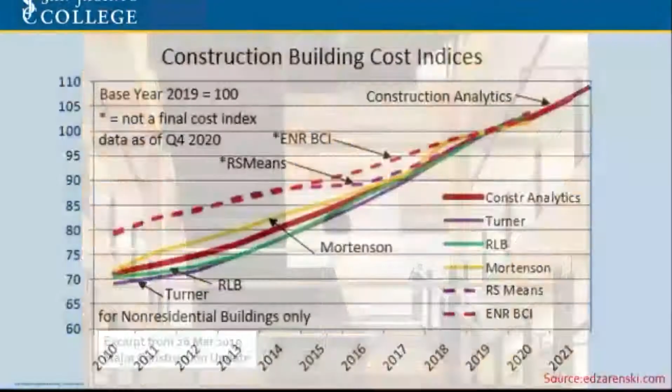Our 2015 capital improvement program was planned in 2014 with an 18% cost escalation provision, which took care of us into 2018, but it was already 2019. We had already realized a 22% cost escalation, perhaps more if you considered the double whammy of Hurricane Harvey and the state's early adoption of the IECC 2015.

Because of phasing concerns, it looked like the best we were going to be able to do was to complete our proposed classroom building in 2021, by which time the forecast was that we should expect a total of 32% cost escalation off our original bond. That, of course, meant either that we might go drastically over budget, which is not an option, or that the signature general education building in our portfolio would need to be scaled back to the point where it's a disappointment to some of our stakeholders.

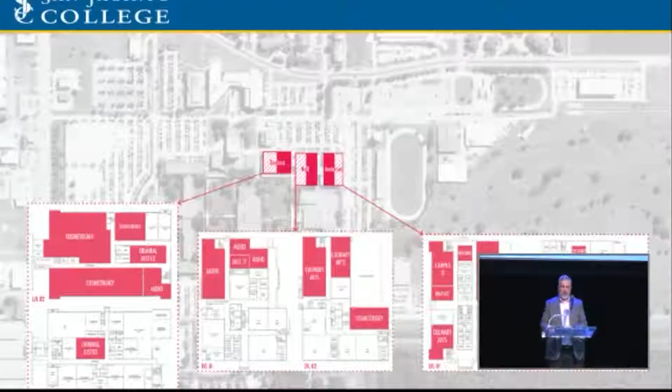Unfortunately, we were unable to accelerate the classroom building by more than a year because of all the interconnections imposed by its master plan site. The new building could not be built until the predecessor buildings were razed, but that could not happen until all the programs that they housed had new homes.

Renovation of the adjacent Davison building couldn't begin until the process technology programs moved into the new LyondellBasell Center in the summer of 2019.

Relocation of the drafting program had to wait on completion of the South Campus Engineering and Technology Building in the fall of 2019. Culinary and cosmetology programs had to wait on completion of the North Campus Culinary and Cosmetology Building in the spring of 2020.

A home had to be found for our fire protection program, which ultimately happened in the summer of 2020.

And finally, the campus IT function, along with the criminal justice and audio engineering programs, couldn't be moved until the Davison building completion, which was anticipated in the summer of 2020. Only at that time could demolition of the predecessor buildings begin, which meant that our best case for construction is the window that we actually hit.

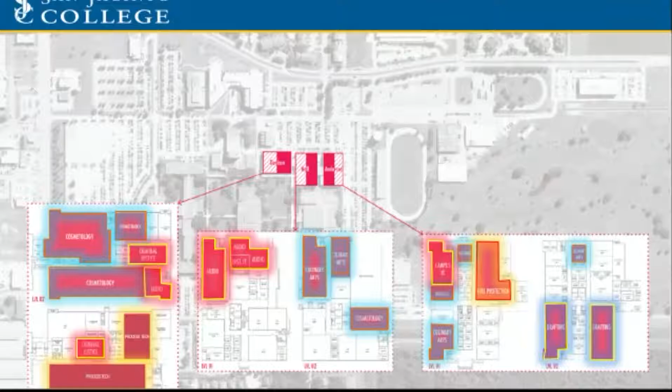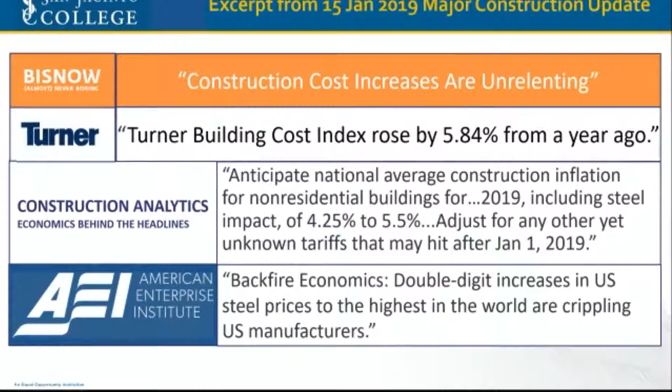So for that reason, we began to look at some alternate construction methods, such as this composite concrete and timber project at the University of Arkansas, as a possibility for delivering the central campus classroom building. In addition, we mined all of the capital improvement program projects that had obtained cost certainty for savings, so that we could bring forward recommendations to our board.

As we went through 2019, it seemed clear that steel prices were likely to continue trending up, although with significant volatility due to tariffs, but that the cost of lumber was likely to remain stable, if not trend downward. These curves are not relative to each other, but relative to their own market pricing as a percentage of their historical commodity price. And neither one of them anticipated the impact of COVID.

So most of the people in the room at this point know that commercial construction stopped, which lowered the price of steel because nobody was taking it. And everybody that got stuck at home, couldn't go into the office, started replacing fences and remodeling their houses, and the price of lumber tripled. Fortunately for our project, we ordered our timber before those impacts took place.

By May of 2019, program leadership and the team at Kirksey had devoted a significant amount of effort into evaluating mass timber as a sustainable and economically conservative approach to a new classroom building. We came to the conclusion that within the size range we were looking at, mass timber, composite steel, and cast-in-place concrete were all cost competitive.

Mass timber had the advantage over composite steel in that it was likely on a declining price curve without tariff volatilities. In terms of sustainability, mass timber outperforms concrete or steel by several orders of magnitude in carbon sequestration.

With great trepidation, I asked the chancellor and the board if they would be willing for the college to explore the mass timber option with our authority having jurisdiction, the city of Pasadena. Because we had done our homework, we were able to answer the two obvious questions: how would it fare in a flood, and how would it fare in a fire? Surprisingly well, and better than you might expect, or better than we have now.

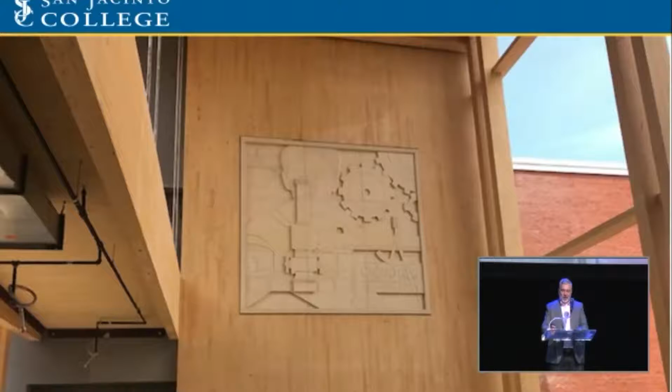These included salvaging this bas-relief sculpture from the facade of the old Anderson building to become a focal point of the new lobby, and salvaging nearly all of the marble cladding that was used on the exterior of the predecessor buildings to be reused at key places inside the new structure.

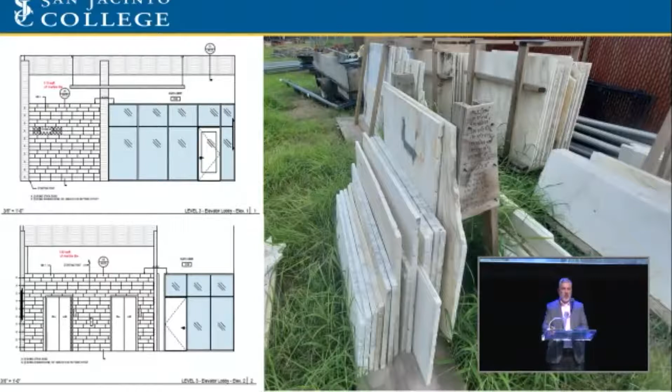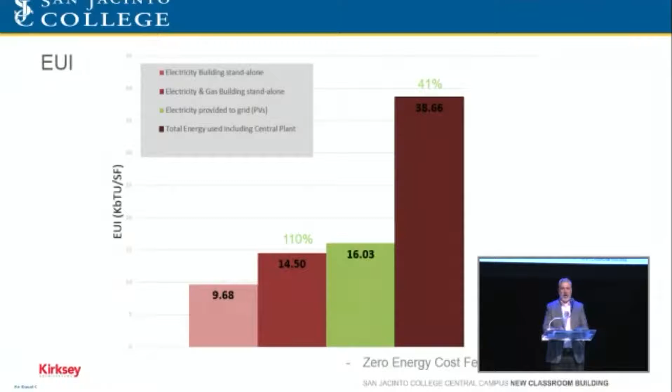The reason for the disconnect there is we're also served by a campus energy plant that we get our chilled water and hot water from. Depending on your assumption set, there was an argument to be made that those solar panels nearly save enough to allow the building to operate at net zero energy cost, which is why this graph was prepared. But we decided to let history validate that possibility rather than claim it up front.

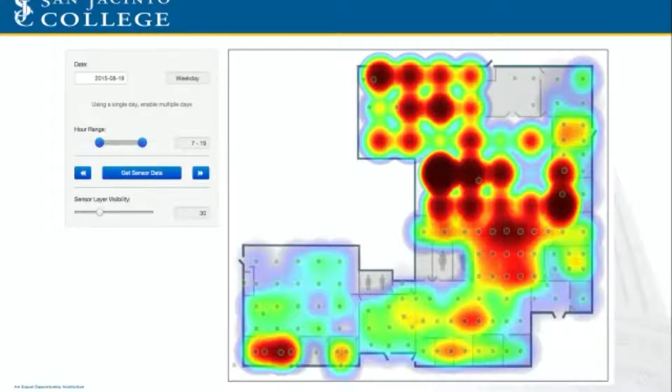We also incorporated smart sensor technology into the building, which will not only control lighting systems, but will learn how people use the building, tell us where people go each day so that we can more smartly deploy custodial resources, and may allow individual occupants to have any space they are working in customize itself to their comfort settings.

And then there's the incorporation of a gray water and condensate recovery system that will reduce the amount of cooling tower makeup water that the college needs to purchase from the city of Pasadena.

As far as what we did wrong or might have done better, these are my thoughts.

Because we knew that the technology of mass timber was sound, our major avenue for potential failure was going to be in execution. We therefore proceeded exactly as our supplier advised us with regard to erection. As you will hear, erection was pretty slick, but we could have doubled or tripled the rate of the plan that we actually committed to.

Everything that we were told about floors related to the acoustic challenges inherent in mass timber. So we included 2 inches of rubber between our concrete slab and our mass timber deck.

And we were coordinating so many details the first time around that we didn't do a high-level review until too late in the process. So we were working on details and we finally got back to thinking about, do we have to do all this? And we're still trying to figure out what that actual answer is. But it's not too early for us to say that with a few minor changes in the assumption set, there was a potential for significant savings.

While I'm still a believer in the reuse of foundations, it did not become apparent to me until too late in the process that we should have forced the footprint of the new structure to largely follow that of the older structures if we really wanted to benefit the most from reusing a foundation.

Big one, thanks. Big one that says push here.

So what is mass timber? There's going to be 100 definitions of what mass timber is when you start to get into your research about this. I've read through a lot of those, and they basically all kind of say the same thing, but I did come across a good article, I thought, by David Roberts in Vox.com.

It put it this way: mass timber is a material that can substantially reduce greenhouse gas emissions. It can slash the waste, pollution, and costs associated with construction, and as designers, create more physically, psychologically, and aesthetically healthy built environments.

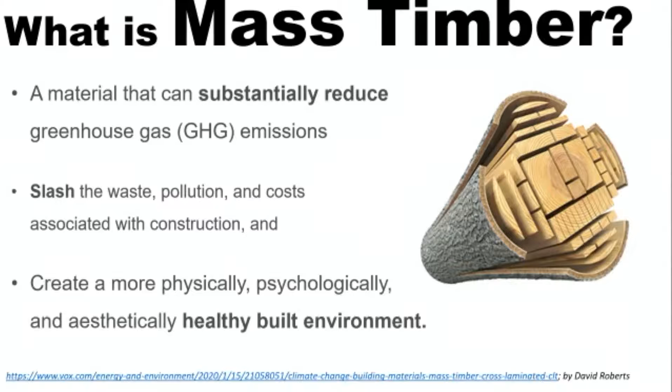If you know Kirksey, we're a sustainably focused design firm, so that was important to us. But why use mass timber? You'll find lots of different things out there about that.

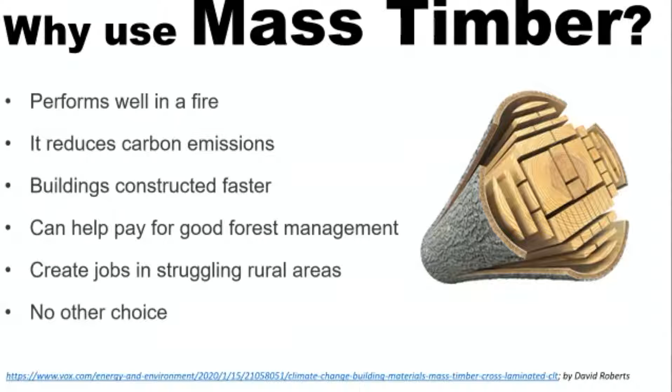It does perform well in a fire, and tests prove that. It reduces carbon emissions for sure. Buildings can be constructed faster, depending on the route you go. And it can help pay for good forest management through the use of FSC certified wood. It can create jobs in struggling areas, which I think we're just now seeing across the southeastern United States, with manufacturing facilities popping up that are addressing the needs of private timber landowners. And there's really no other good choice. If you have a certain number of these sustainable things you want to check off your list on your project, there really is no better choice.

In fact, I mentioned FSC wood. Sustainably harvested wood sequesters a third more carbon than unsustainably harvested wood, mainly because there's some oversight. The sustainable forest includes programs involving soil management and optimizing growth cycles, among other things. But it is essential to get that benefit with the carbon reduction by using products that have the FSC label.

There are others. We're seeing more Sustainable Forestry Initiative, SFI certified wood. That's becoming more common as we get into research. I know primarily here in my career and on the Gulf Coast, FSC wood has been the thing that comes to mind. But as you know, sometimes clients just require steel, they might require concrete. We can have that conversation, but we have to deal with these other materials too.

The largest manufacturer of steel products in the world, ArcelorMittal, is certainly trying to make efforts into creating or reducing carbon, creating carbon neutral steel. I think personally the concrete industry and the cement industry have a long way to go. In fact, the little text at the bottom of that cement plant says global cement production is responsible for about 8% of the world's carbon emissions. So I do think they have a long way to go, but I think essentially we're starting to find players in the market that are addressing the need to have a response to carbon neutral and climate change in the economy.

Mass timber products, there's a lot. We know glulam and CLT, cross-laminated timber, but there are other things out there to note, it's not just one or two things. There's parallel strand lumber, which a lot of us might be familiar with in terms of beams. There's mass plywood panels, nail laminated timber, dowel laminated timber. Those are two options that don't involve adhesives, and that is important. Of course, most of what you'll find, most of what we're seeing and talking about in our conversations are glulam columns, beams, and cross-laminated timber or CLT.

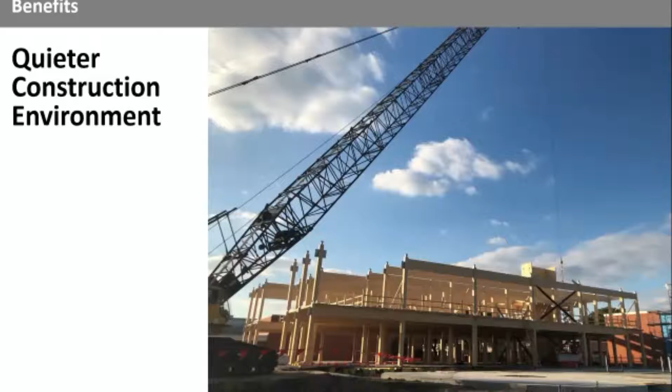So why mass timber at San Jac? Chuck laid out a lot of why from their viewpoint. My presentation is really about from the designer's viewpoint, the architect's viewpoint. Clearly, the quieter construction, which doesn't become apparent until you go to a job site that has a mass timber project under construction - it's eerily quiet because there's six guys on site. One's in the crane lifting, another's tying up the connections to hoist it, and there's a couple on the building over there. It's just kind of weird. That only happens, of course, during the erection process for the most part.

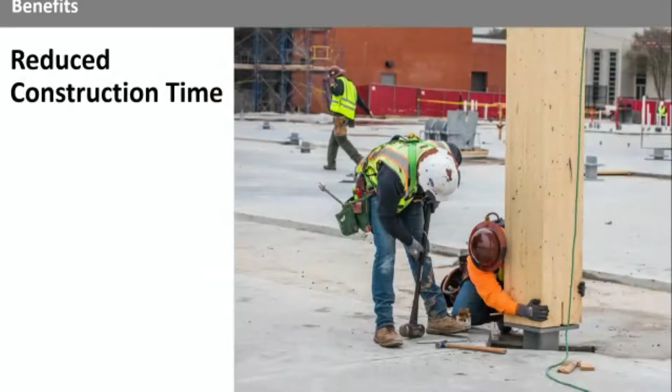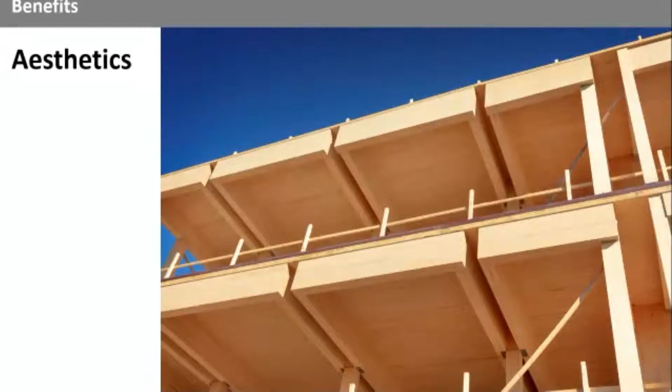Reduce construction time, that's important. There are ways to really address construction time issues, and that's what we're talking to our clients about. Reduce foundations - Justin will talk more about that, but it is pretty interesting. And aesthetics, as designers, this is important to us, so we see a lot of that. Fortunately, we had a client who was focused on aesthetics being great, but the dollar is important, the budget is important here. That was a good balance, I think, in having that with our project.

So just some things I want to mention that we've put together over the past year of watching this structure go up. In the early part of the design phase, Chuck mentioned this as well - it's so important to talk to all the folks that are going to have a position in your project, so that's for general contractors.

We had a conference here on campus and invited a bunch of general contractors. Daryl and I presented and talked about the building and floor plans and all this neat stuff, so they got to see it and ask questions about it. There was sort of an education that happened even before the selection process.

Interview mass timber suppliers, very important. We had a number that we reached out to, and we had large team meetings where we went over a lot of material. The mass timber design assist, once you have the mass timber folks lined up, was so important.

This image, I think, shows the subtlety of it. I want to point out that while you had this VP in the room and that VP in the room, and this vice chancellor and that VP of construction—all these VP people in the room talking about it—you have to have the folks that are drawing and modeling and creating the thing in 3D. They need to be there in all the meetings at the front because they have to know what they're getting into. There'll be a lot of reasons and questions that guys like us can't talk about in terms of BIM 360 modeling and all that. You have to have the folks in the room that are going to be putting this down on paper, so to speak.

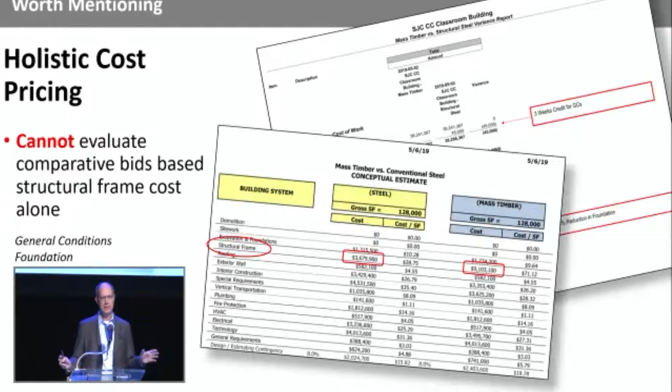Part of your cost savings is going to be in schedule. I circle structural frame there to point this out, because ultimately what happens is you will come across a contractor or whoever's doing the pricing—there are lots of other companies that help do pricing—and there's such a disparity in their numbers that you just start to wonder, maybe they weren't all that excited about it, maybe they decided not to do the research that led to this great number. So if your client is going, 'wow, one is 9 million, one is 3 million, well heck, we're going to do that one'—dead project right there. You haven't even gotten past the end of design and the project is dead if you want to do mass timber. You have to look at the whole number at the bottom line.

Grid layout is so important. Justin could speak to that, but without understanding the importance of the grid, the depth of the beams—the mass timber manufacturers talk about the volume of fiber, which has nothing to do with how big a glulam beam is or how thick that is, they're talking about the overall volume of fiber. So we analyzed that. The classroom building like ours goes great because it does have a module.

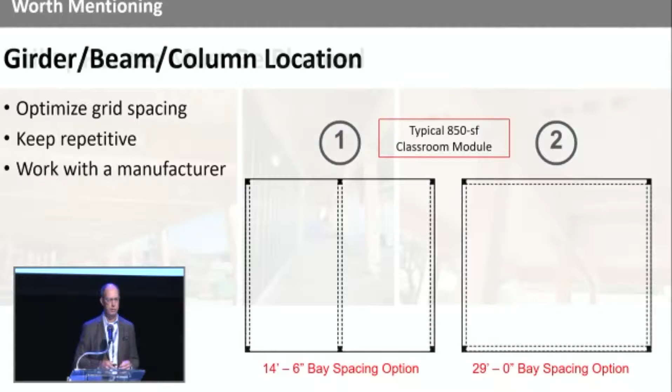We're doing a housing building at Rice. As you can imagine, a dorm room is very modular, so it's working out great for that. It's so important—we ended up going with option one here for our project because it was less volume of wood for the structure. Utility routes need to be planned.

I see Heather out there. Understanding that and modeling every little thing, you have to understand where those pipes are going and what beams are being penetrated.

Code issues: you can't have your wood structure in the exterior wall on this type 3B project. We had a little overhang on our CLT decks that got into the wall, so we had to do special fire treating just on the part that overhung. You'll see the red type of wood—that's fire retardant treated plywood covering up that section.

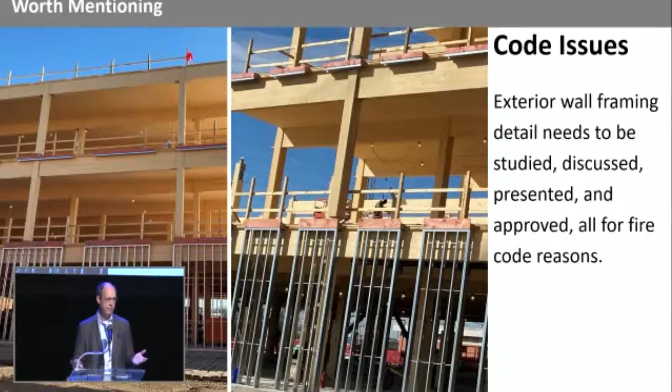Very important—we talked with the city of Pasadena about this, and great, we submitted it. For Rice, talking to the city of Houston, they said no, not going to allow it. So what's your next option? It's just not the same. You have to get the city officials involved, work with them, work with the fire marshal to find out what they'll accept. We did find a solution.

So there is a solution for all this. What we did is the wood sections got installed, we went out, documented, made notes. Essentially we did a punch list, provided to the contractor. I think everybody appreciated just having this. So all these things can be addressed, and they can literally replace pieces of wood in sections if need be, that are damaged too much. So it's not too much to get stressed out about.

It rains, so have a plan. What we heard most from the University of Arkansas project with Nabholz Construction: just have a plan, have folks, have a guy dedicated to squeegeeing off the water every time they come to the job site. If it's sitting on the wood deck, just squeegee it off, you'll be okay.

We learned a little bit more about what happens when you've got the acoustic material down and you have a pour edge around the perimeter of the building, and you're ready to pour tomorrow morning, and that night comes a downpour, and the water has nowhere to go and it sits up there all night long, and you come to the job site and there's half an inch of water everywhere. What do you do? So there was a plan.

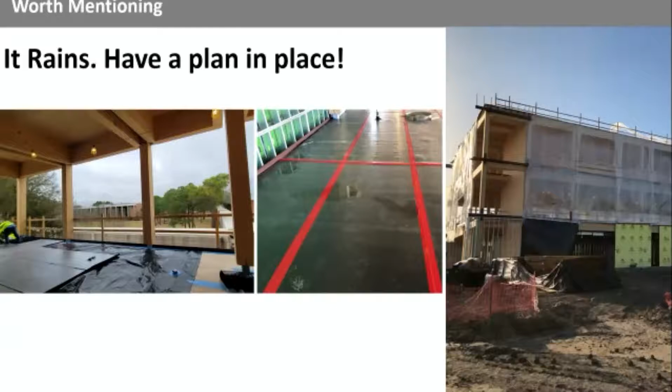Eventually they came to the quick conclusion that they needed to cover up the building, which you see the plastic on the building. I don't know if that's the best response. It was what we did there and it worked, and they got on down the road. So I think we would probably have a different response next time.

Pouring on the deck, it's just, you know, a busy time. They're all crammed in, they're doing a bunch of work. You've got to protect the wood as best you can. That's important, and I'm sure they had discussions with their installers about doing that.

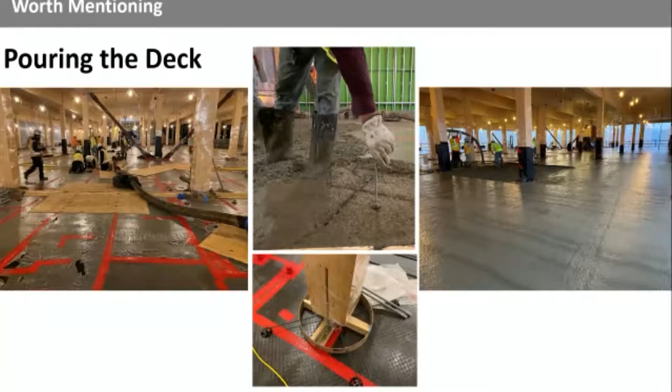Show the block-out there at the bottom of the column. Great idea - Tellepsen had to do that to make sure we're isolating any potential for building movement and cracking. So it just solves that, it keeps it very local right there to the column. And they moved on.

There are hybrid systems - Chuck mentioned that a little bit. You can utilize steel structure and a wood deck with CLT. You can do a mass timber structure on a podium, a concrete podium. That's all a possibility too. There's examples of that around the country. So there are different ways.

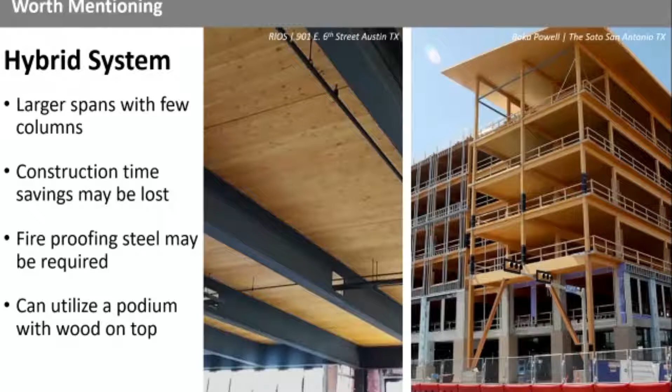Our project, which we wanted to stick to, was as much as possible a fully wood constructed frame. We did end up going with some steel lateral bracing for a number of reasons - it was the right choice. So you'll see some steel X-frames out there for lateral bracing.

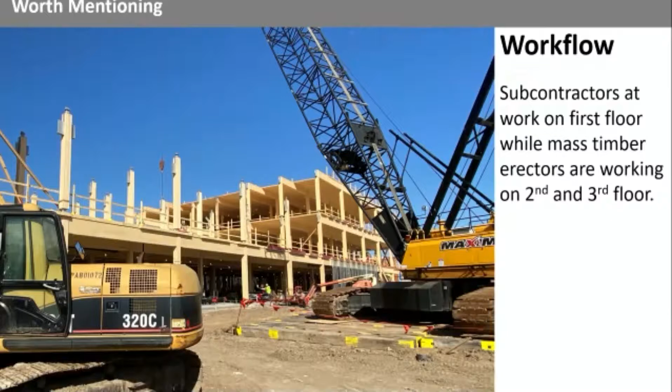CLT walls - this is of interest. The project, University of Arkansas, had concrete shaft walls for elevators and stairs. I remember talking to them about it - they could have had a solution with wood, but the fire marshal at the time was very uncertain about wood and shafts, and they decided, let's not argue about this, we're just going to do concrete CMU block. That's what they did at Arkansas. So we had that knowledge, and we came back to our code officials in Pasadena, who were very willing to work with us.

And I remember that meeting. We all sat around the table. We showed them this, and we thought they were going to be wow, this is great and all that. And they're like, well, that's nice. Are you going to design and build it to code? And of course, the answer is yeah, we're going to design it and build it to code. They said, great, what else do we need to talk about? And we came prepared with graphs and charts and all this stuff. And so they sort of started to get up, and we said, that's great.

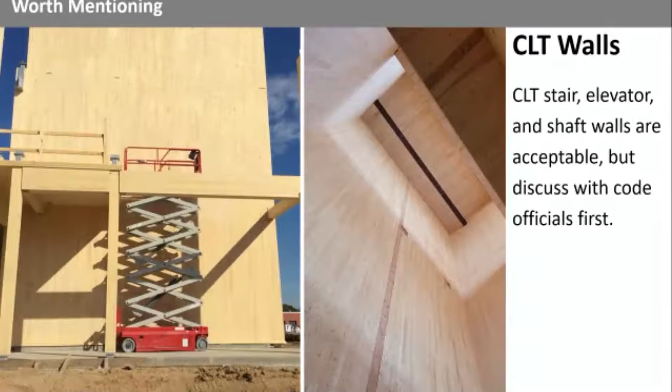And by the way, the elevator shaft and the exit stairs are going to be made out of wood paneling too. And that caught their attention. They turned around and gave us a funny look and said, that is something we are definitely going to have to talk about. And so we did. We talked about having big, giant, standing CLT panels on end to go up 3 stories, one big panel. That took some discussion, and ultimately we got to a point where we were able to use that, and it's installed up there and you can see it. But the point is, whether you can or can't, you have to have a discussion about all these components to get the authorities up to speed, because some are not familiar with it.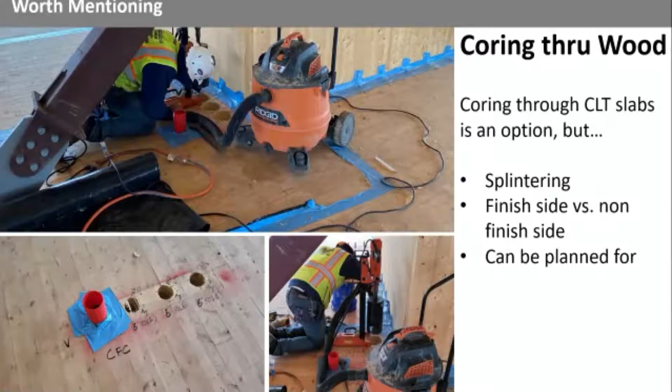Coring through wood - you don't want to get to your job and make a habit of having to core through wood. You can, it's wood, right? That's what we kept hearing at conferences and things like that. But go home and physically go get the biggest drill bit you have and start trying to go through about 7 inches of wood. It's not easy. It takes some labor, but Tellepsen had guys out there that were prepared. They have, in this case, a coring drill that allows them to go through.

So it's important to understand there's a finished side to the CLT panel and a not finished side - what's going to be seen, what's not going to be seen - because drill bits can splinter on the other side, and that's just something to deal with. In our case, we came up with a solution that I thought, again, we never heard about this at a conference, but it makes complete sense.

In the hallways, if we had pre-cored holes in the CLT panel at the factory, we didn't want it to be off by half an inch or an inch - close, but not quite - because you're getting that straight view down the hallway. We wanted it to be perfect. So we didn't have it done with the CNC machine at the factory. We came back once everything was in place, chalked a line, got the drill holes right down the middle, but we had planned for it. So it's a great solution.

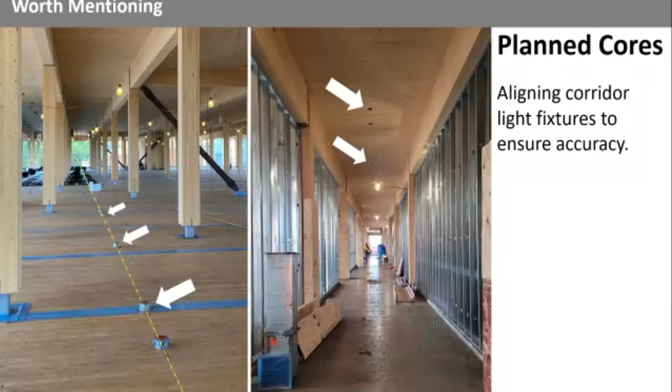And there are a lot of little things like that in the course of a project that I think is important to understand. Also, we wanted to see the wood in the hallways, right? We know you look up, you see wood. It can't be 100% wood everywhere. There's got to be infrastructure, ducts and piping and all that stuff. You have to plan the areas that you want to see the natural wood. Lobbies are great, obviously, but what about the rest of the building?

So our strategy was - if you can see, looking down the hallway, on the left-hand side, you see all the infrastructure going. That's going to be in classrooms. It's going to be covered up, in ceilings, with access and all that stuff. But the hallways are going to be nice and clean and crisp. So I think that was a design feature we wanted to focus on.

So working with mass timber definitely requires pre-planning to understand manufacturing differences. It's easy to understand in terms of how this goes together - it's like a tinker toy type thing. But you have to get it right in the model. The BIM model is so important, and you have to educate your team on why you're doing this, because they don't know - they don't have all the background. You didn't take whole teams to the conference and get all excited about it. They don't know, so you have to educate them, and eventually everybody can get on the same page. But what we found out is there's 100 different reasons why you can say let's not do this out of wood.

Let's just go back to what is comfortable to us. You have to stay focused on the end goal. And fortunately, we had a client who was, and he mentioned it, they were all in for good or bad, they were all in on the wood. So that made a big difference.

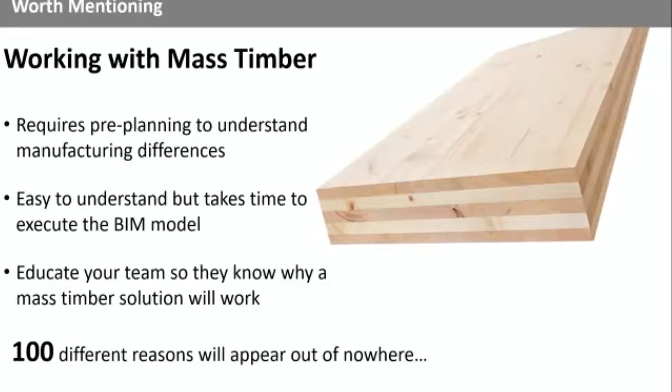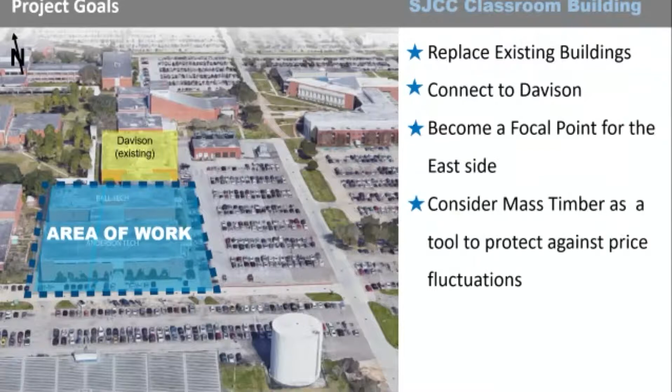A little bit about the project. We're replacing two existing buildings. We're tying on to an existing building, Davison. And Chuck used the mass timber as a way to protect against price fluctuation. That was an important part for him.

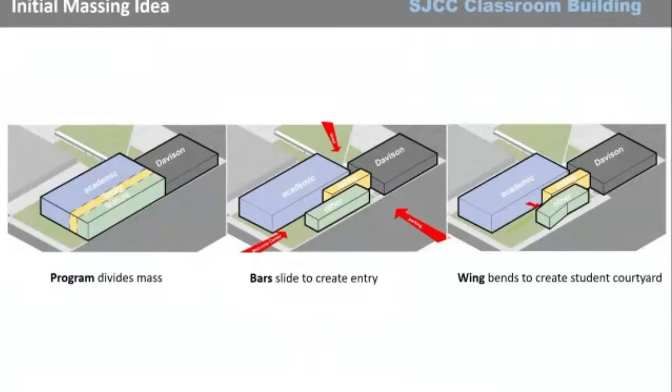The part of the project here, the volumes of spaces that we needed, you can see the designers, how they shifted, tried to give it some interest. We really tried to keep the design simple, and I think that was important. With our first mass timber project, we really didn't want to try to do some weird things that it's not set up to do. I think the more we understand it, the more we can venture into that design part of it, but we wanted to keep a pretty simple building.

Quieter on site, all the solar panels, which were an alternate for a length of time, and then eventually it was decided, let's do this. So they're doing it. The gray water system is interesting. The sage glass, the electrochromatic glass, if you will, on the curtain wall sides there. And of course, the educational branding throughout. Our team at Kirksey is going to help create some educational branding boards that'll be throughout the project.

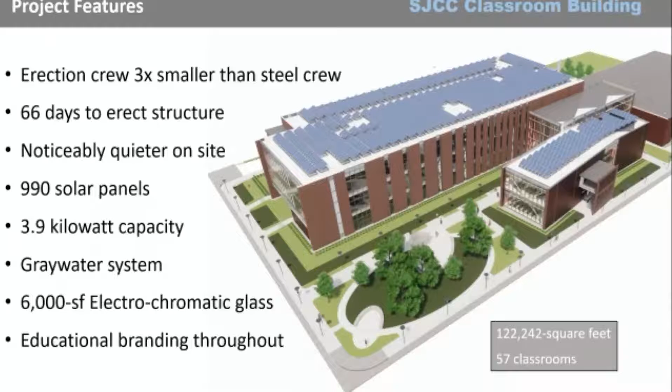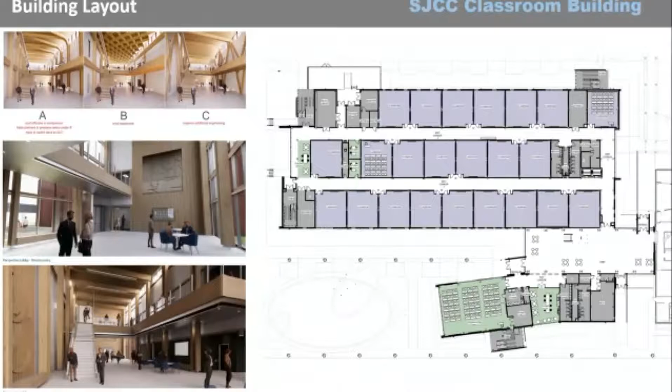So just the general layout, there's a three-story structure, and then the two-story structure facing the parking lot connected by a two-story volume lobby, what you're going to see out there. It's again pretty simple. These are simple volumes. There's brick, there's curtain wall, and hopefully at the right time of the day you'll be able to see the wood expressed on the inside.

We did decide to make the lateral bracing there on the end, express that in wood, which is an option. It would have been an option for every lateral brace in the building, I think. But some of that is steel, but we wanted to express it here sort of at this main entry point. The lobby was the one place that we decided we could sort of create some interest with design features.

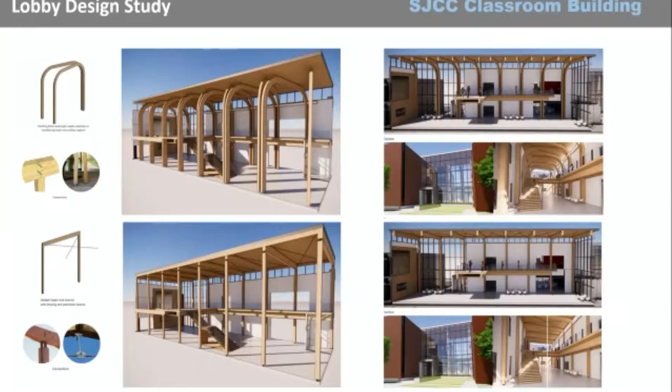Michelle Old, our designer, and Melika and the rest of the design team really did a lot of studies about looking at the lobby. What can we do? What can't we do? We talked about bending the wood and what's the radius you can bend glulams and all that stuff. We eventually landed on this double beam, double column system, which provided some interest.

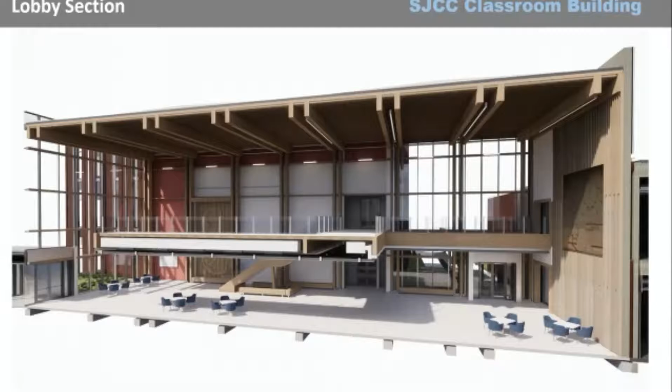Again, it's pretty simple, but by having the double beam, double column, we are able to hide some of the infrastructure in between those in the dark shadows. So we are utilizing places that we can for sprinkler pipe or lighting, electrical conduit, and such. The goal was to try and keep it as clean as we could. We saw a lot of examples of mass timber buildings that just had, for lack of a better technical term, a lot of goop up in the ceiling that was kind of running everywhere. We wanted to be prepared for that in our design, to try and not have that clutter up the ceiling.

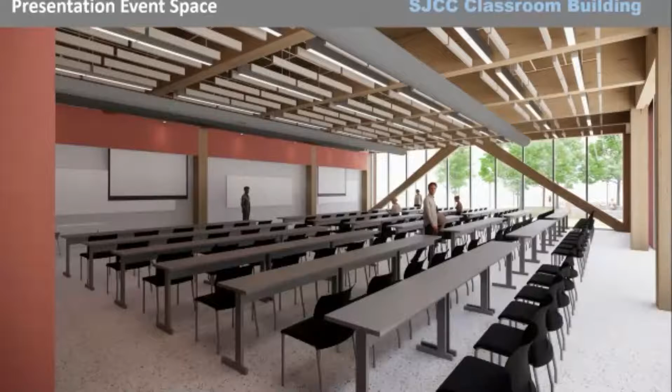I show this, it's a big room, a presentation room, but we have some acoustic attenuation in there, suspended. Daryl's going to talk about acoustic issues in a building briefly in a later presentation, but acoustics are important. We didn't have an acoustic consultant on this job. We did a lot of the research ourselves to try and find out what we need to do. It is an important feature, so you would think about that if you're able to work on one.

This is, I'm going to have him cue up this video in a moment. We did a lot of drone footage. For this project, we've hired a fellow to come out and do a drone run every now and then, a professional photographer to document the building going together. So we're going to create a lot of material that we want to share and create some educational access for others to see that. If you could start the video now, it's just a quick video showing part of the installation.

So just in closing, mass timber is happening, and it's all part of the larger conversation about climate change and carbon neutrality. Just in the paper this week, there are articles every day talking about things that address all of this. In fact, Gensler released a statement, and a lot of firms have, but in this article specifically, for the first time in as long as I've been tracking this in the Houston Chronicle, it actually mentions mass timber as an option, as something that absorbs carbon as it grows.

Engineered wood has potential to be a green building material, and I would say the potential is sort of gone now. It is an option. It's not potential—it's there, it's here, it's exciting. We are embracing it as much as we can, and I would tell you to do the same thing.

We got in the car, we made appointments with folks, we said we want to come see your building. We went up to Denver, we've been to San Antonio, of course we've been to Portland and Seattle, we've been to Arkansas. We wanted to see other projects for our education, so that when we take this to a client, we know what we're talking about. I would advise you guys do the same thing. It's starting here today by seeing this one—this is a good one, but there are others.

They're two two-story concrete structures, with a concrete second floor and concrete roof. This is the plan of the existing foundations overlaid with the existing buildings in red outline and the new building in green. I don't really want to get into a debate about architecture and the difference between contemporary architecture and program space, and what the footprint of a building looks like today as opposed to 50 years ago. But that's really the deciding factor in why we didn't reuse a lot of the foundations.

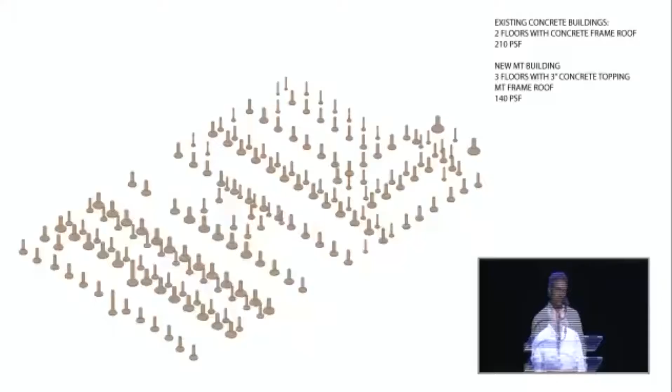It's also tempting to look at these foundations just in the layout and the use of space, and note that the module of the existing buildings is about 16 feet bay spacing in one direction and 40 feet in the other direction.

When we started this project, we were looking at a bay spacing of 16 feet by about 32 feet, and we wound up at 15.5 by 28.5. So that's what worked with the classroom module. But you can see we're very close actually to the concrete skeleton layout of the original buildings.

The issue arises with the lateral system, and I'll talk about that a little bit later in the presentation, but these concrete moment frame buildings distribute the wind force to each and every pier pretty much evenly. In the mass timber building, that's not possible, so we need to have concentrated wind forces at some location in the building.

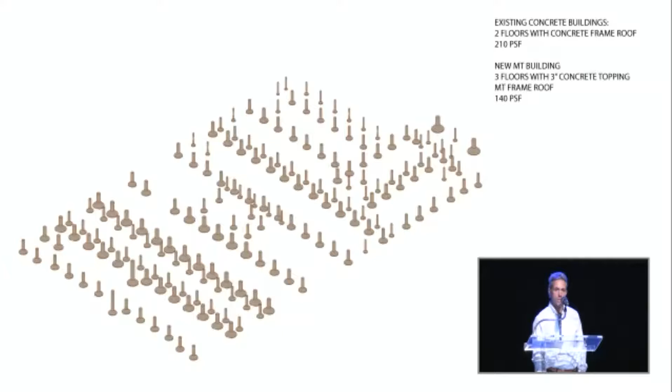Even if we had built like-for-like buildings, mass timber on the exact floor plan of the existing buildings, we still would have had to do quite a bit of foundation work for the brace frames. I'll show that later on in the presentation.

This is the new foundation that we put in, overlaid with the existing foundation. Like I said, it's a hybrid system. What you see in red are foundations that we had to pull out.

The alternative, really the only alternative to what we did on this site, was to go in and pull out all of the existing foundations. Structurally, that's of concern because we don't want to disturb the natural soils on the site and cause ourselves any future potential risk of building movement. So we wanted to leave that foundation system in place.

And if we're going to leave it in place as densely packed as it is on the site, then we want to reuse as much as possible.

This again is the final overlay of the two systems. The black piers are existing, and you can see they're really densely packed on the site. They just don't align with the columns that we needed for our new buildings.

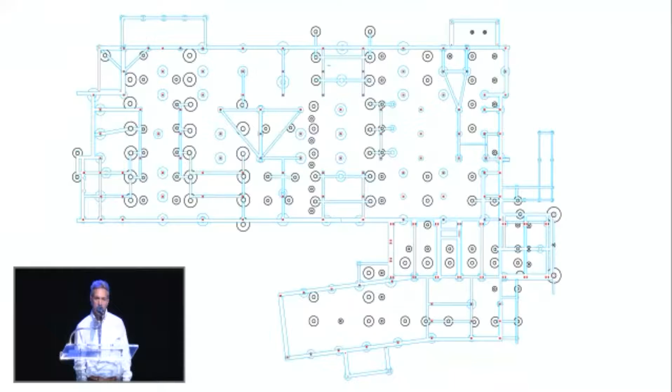So we have quite an intense system of transfer beams that transfer the loads from our new columns to our existing piers. All of the piers in blue are new, drilled in the field of the existing piers. And I can tell you that in the 3-story volume alone, we had 110 columns and 82 new piers.

So we did save the delta just in a flat-out number of piers per column by using the existing system. On top of that, the new piers we did put in were always smaller than they would have been if we had razed all of the piers on the site and started over clean. So there was some material savings in this process.

I'll just say that it's really analysis intensive, and I'm sure Tellepsen would agree that it's quite labor intensive in the field too. A lot of unforeseen conditions, as you can imagine, when you get into this.

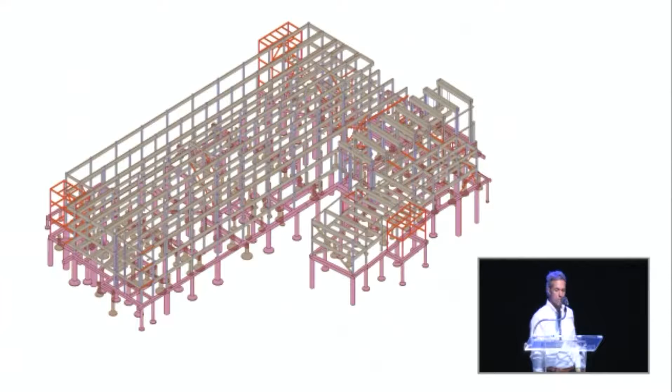So this is the structure overlaid with the foundation, and it starts to look really like a normal building. Here you can see I've highlighted in red the steel on the project. So I wouldn't call this really a hybrid building, but it does have a fair amount of steel.

The steel is used at external egress stairs you'll see on the tour, and we did that for durability reasons. We wanted to have galvanized steel in the exterior conditions for structure. And then we also have a steel lateral system in this building. That was a big early decision.

We looked at CLT shear walls, and CLT shear walls in the beginning made a lot of sense for us. We definitely explored that with quite a bit of enthusiasm. It didn't price out. One of the major drawbacks to the CLT shear walls for us was the allowance for MEP passage, so we get a much bigger brace frame with the steel.

The bay is twice as wide as you can see here, but we still have a lot of opportunity to run mechanical and electrical through the space.

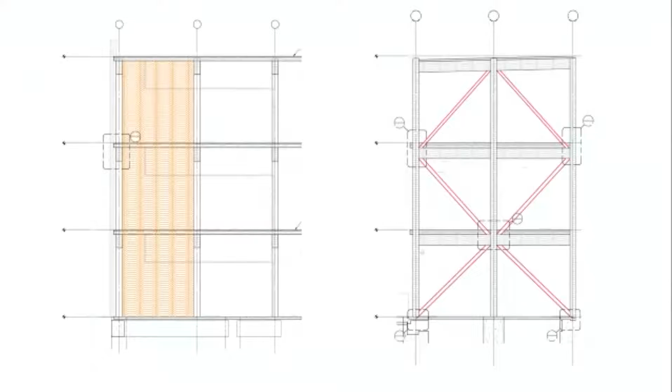Our original layout of CLT walls looked like this, so it's an awful lot of walls. The shortness of the wall causes the hold-down force on the end to be quite high, and that's why we need so many walls. That's the reason it didn't really price out as competitive with the steel cross braces.

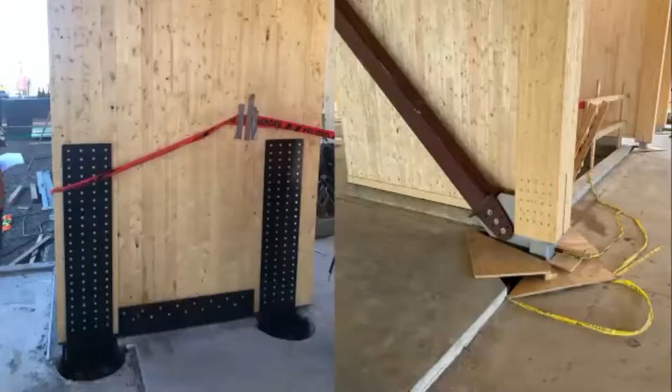In hindsight, there was a lot of discussion about the aesthetics of the hold-down of the CLT wall. I think we'll get more and more comfortable with these hold-downs as time goes by. I mean, real honestly, it's not any more intrusive than the steel we're used to on the brace frame.

This is something I'm really happy to have been able to compare. Believe it or not, this is a steel building that the exact same team did, Kirksey, Walter P Moore, and Tellepsen, about 5 years ago. It's almost the exact same building footprint, about 300 feet by 100 feet, and the 3-story mass of our new building is approximately the same. The floor plate in the steel building is 26,000 square feet per floor, and in ours it's 33,000. So there's a little bit of difference there.

What I found comparing these two buildings is that the structural weight is just about the same when you look at beams, girders, and columns. The mass timber building has 110 columns shown here, and the steel building has 35 columns. But the mass timber building is a bit bigger in square footage, so scaled down, it's about 86 columns in the mass timber building per 35 columns in the steel building. So you get a lot more columns in the mass timber building, but you don't get a lot more weight.

The foundation system on the steel building is actually quite a bit heavier than the foundation system on the mass timber building, so we still save money in the foundation, despite having to build a lot of transfer girders to reuse existing elements. Our structural weight in terms of the skeleton is very comparable, and the big delta shows up in the floor plate. Our steel building had a 4.5-on-2 composite deck at 72 PSF, and our mass timber building is 52 PSF. That's a huge savings when it comes to foundation.

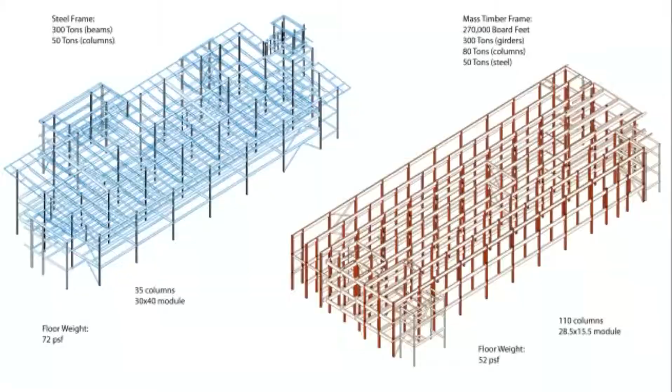You can really plan your construction a lot differently. I looked at the erection schedule for the steel building we looked at on the previous slide, and the erection schedule for this building, and there's really not a big difference. One caveat is that during the erection of this building we had a major ice storm and a lot of other difficulties on site, while the other building was built in springtime and summer with no impediment from nature. So this schedule got held up a little by forces we couldn't control.

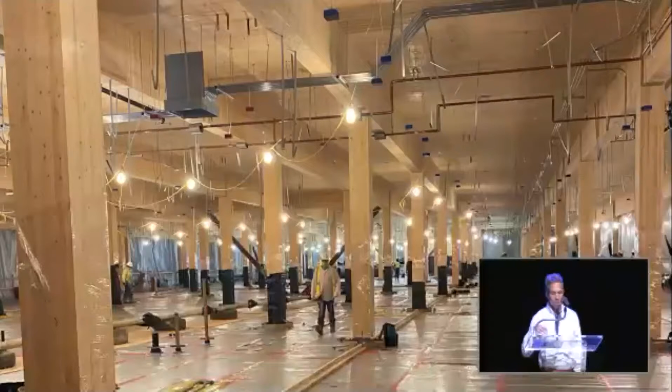But the big difference is we can immediately go onto these floors and start doing internal MEP work. All of this was done before the concrete subcontractor showed up to pour the topping slabs. This is the morning of the first topping slab pour, and you can see they've already done a ton of work on the inside of the building. So those two periods in the construction schedule get to overlap in these buildings in a way they don't overlap in a concrete or steel building.

Steve showed this detail that Tellepsen proposed for the block out around the columns. What we found during the design of this building is that there are a lot of typical details for concrete buildings and steel buildings that just don't exist for mass timber buildings like this. So we're tasked with inventing a lot of those details. This one came from Tellepsen, and we really liked it, so we're doing a similar building and going to use this detail. Hopefully they haven't copyrighted it yet, but I get the thumbs up that we can go ahead and use it. It worked really well for us.

I hope when you're out there today on the tour you see that these slabs are crack free, that the control joints are placed really nicely, and that the concrete work is done really well.

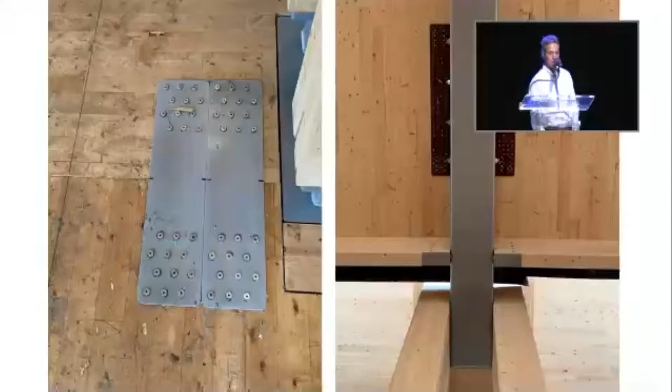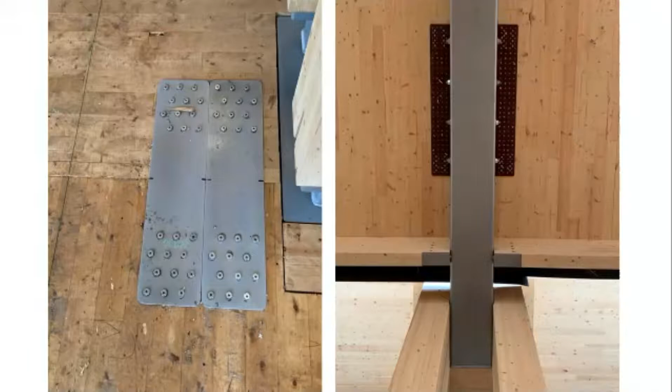Some steel elements gave me some fits but turned out not to be a big deal. One takeaway from this project is that because it was such a new thing for most of us, there were a lot of concerns and worries about how things were going to go. And at every turn, things went a lot more simply than I think we ever could have expected.

We were concerned about how to develop the diaphragm forces, particularly the chord forces in the wood diaphragm. We gave the loads to Nordic and they just took care of it — 'oh yeah, no problem, we put steel plates here,' and out in the field it's already taken care of.

We were concerned about transferring high wind forces from one building mass to another, and we did that with these steel elements here. We designed and detailed them, and Nordic installed them, no problem. So there were a lot of things that we felt were new and inventive, and they just got done as if they'd been done a million times before.

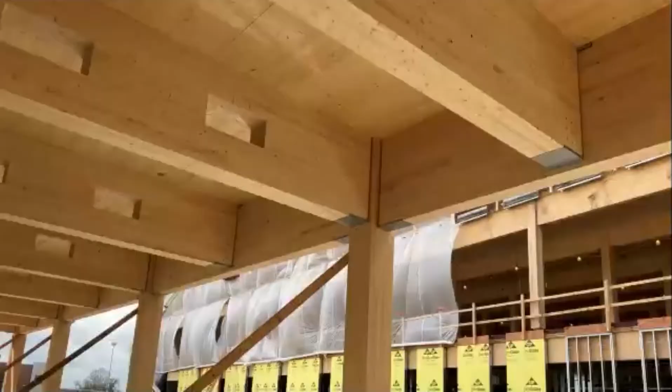A lot of the things that worried us — driving lifts on the slab, how the slab would perform, how details would be done in the field — actually went very smoothly. Mechanical penetrations are something we don't do very often in steel. It's totally possible, but it happened really seamlessly on this project.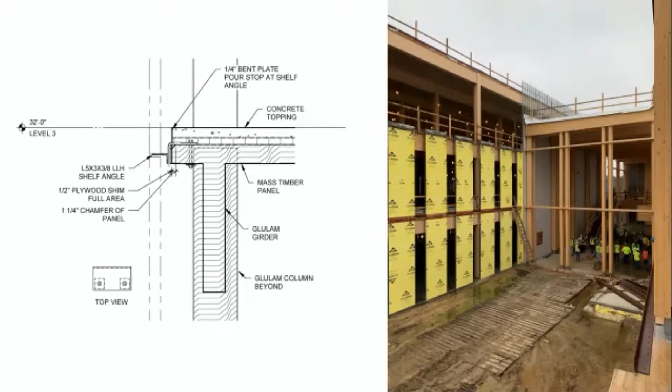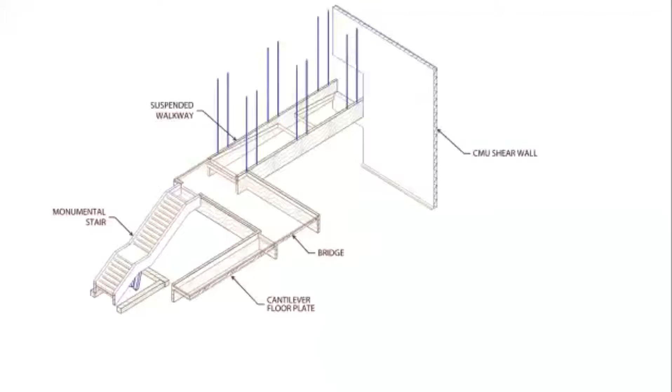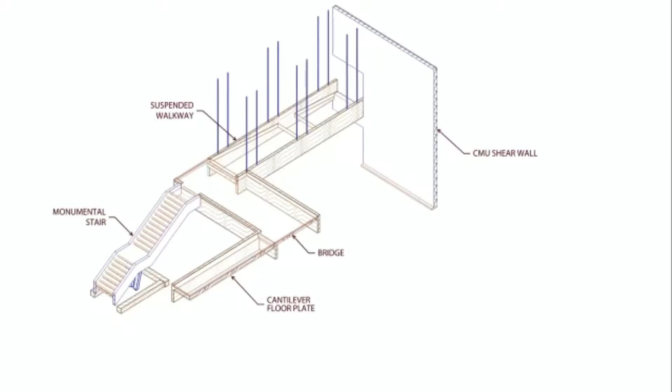One last thing about the lobby - Steve talked about it using the exact same language I'm inclined to use. We looked at a lot of precedent projects, and there seemed to be a lot of clutter in these open spaces. Kirksey wanted the space to be quite complex, but also quite slick and free of that clutter. So we have many different structural elements here: a CMU shear wall, we hung a portion of the walkway from the roof, another portion spans from building to building like a bridge, and another portion is cantilevered from an adjacent floor plate. We did a little bit of everything in this lobby with the intent of not having a lot of ancillary structural elements - too many hangers, additional steel, exposed steel, too-heavy wood members, anything that could make the space look heavy and cluttered. This is that interior space - it's starting to look really sharp. I think with the light in there, it's going to be great.

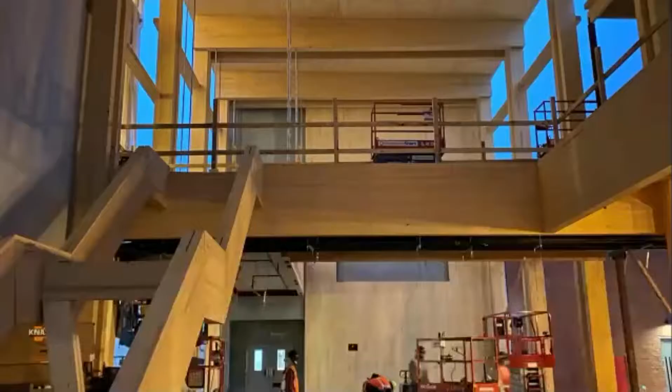One last shot of the interior lobby space. The only thing really cluttering up the space is the construction activities going on, and I'll let Pat Pollard tell you about that. Thank you.

Good morning. So, is this hit the button? All right, so now you get to hear from the contractor. That's a pretty good talk there from Mr. Smith and our design team.

It's been an exciting project. A few months ago, Chuck reached out to us and said, hey, we're going to be doing another conference, and I want you to do a piece on one year later. We've been at this a year now - what does it mean to us? And we have no regrets. It was a little crazy when we first heard about it - it was early 2018. We had a lot of discussion coming into the office. The idea of mass timber was making its way down to our market pretty heavily. It sounded good, but we had no experience in it, so we weren't real excited about it. But we knew some of our partners like Kirksey were already down that road. And when Mr. Smith brought it to us, we said, man, what do we think? And we think we're up for it. We want more - it is very exciting right now in Houston.

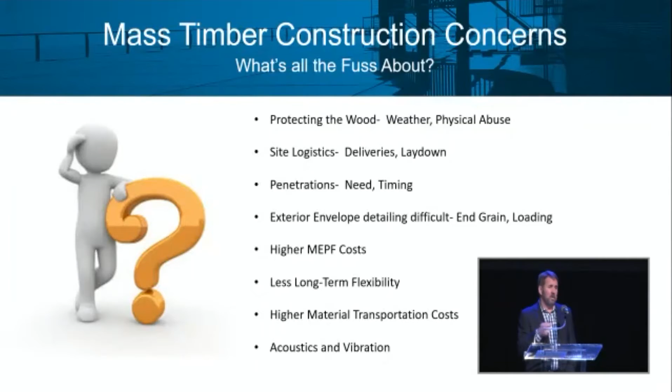That's pretty crazy. Acoustics and vibration we touched on - it has been a little bit of a problem, not so much vibration. Our concrete guys got up there and jumped around and said this is way better than steel, and that's the perception when you're actually working on it. Acoustics, I think I'm a naysayer right now. I think technically, when you do the math on sound transmission, we have the right solution to meet a pretty stringent specification. But in hindsight, we would all spend a lot more time - we'd like to run an experiment on acoustics to see, do we really need what we have out there right now?

Home runs - the team, great team. The college, the design team, we've all worked together for a long time, and it took collaboration here. You saw the bullet train, the craziness of immediately shifting to a non-traditional project delivery approach on a new subject matter in our region. Couldn't ask for a better team. Mass timber fabricator Nordic's great - we made the right decision. Working with some other guys on some other stuff right now, but we made the right decision for this project, really appreciate them. BIM coordination, again, very important - make sure when you're selecting your team, it was a high criteria for us in getting our MEPF team on board, and they're a high powered team.

So putting models together and making sure files are right. And when you're moving like a bullet train, file management is very important. You may be working on a file that is 2 hours old. I mean, everybody's just moving really quick.

We did it well. Safety, I've got to say this about safety. This has been the most incredible erection process I've ever been involved in. I've been doing this 20 something years now.

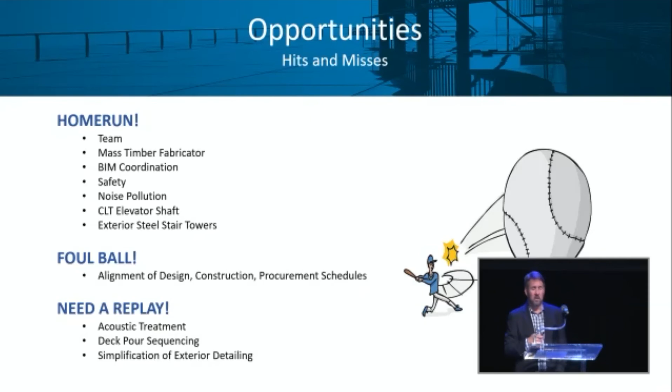So I must talk too slow. So I had some other stuff, but we're going to wrap it up. There's some case studies here that we can talk about. Find me. I'm going to go to this one right here.

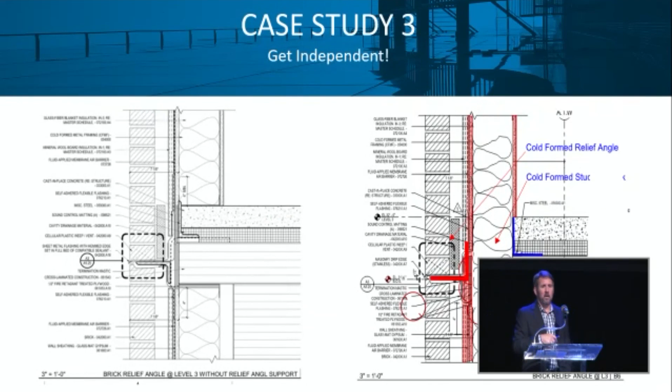And we would have liked to have seen that third floor relief angle be owned by the cold form framing designer easily. We only have one floor. So this would be an application in a smaller floor where masonry could be gravity loaded for the first two floors, supported off the cold form for the third floor, bypassing that slab completely.

And man, we could have built the entire exterior of this building in Baker Drywall's shop. And we probably could have enveloped this building, in hindsight, in a week. So when you go out there and look at the building and look at the vertical panels, think in your head, could this thing really have been wrapped in a week? Superintendent says, I could wrap this in a week with this team, with these panels.

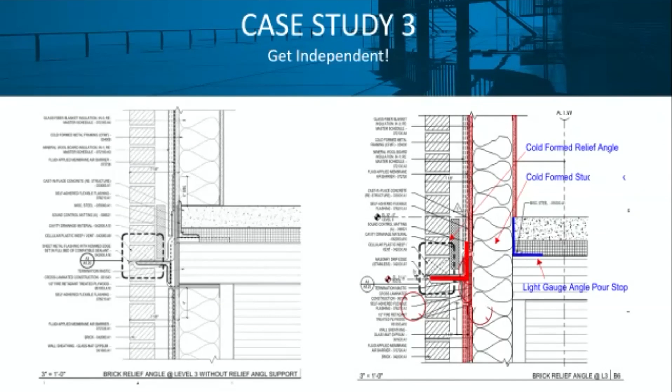So think about that in your future designs. Again, it goes to the innovation of mass timber. Everybody has to be thinking modular design, something we'll talk about later. Okay, that's it, I'll wrap it up. Thank you, everybody.